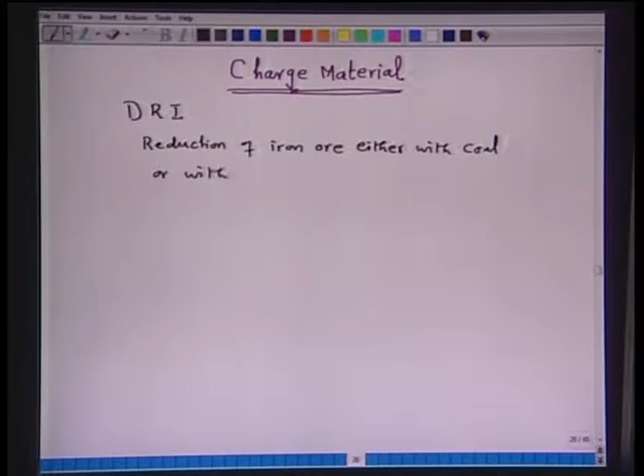Now, another charge material is the directly reduced iron, and that is what I will be telling you something about today. In fact, this directly reduced iron is produced by reduction of iron ore either with coal or with gaseous reducing agent.

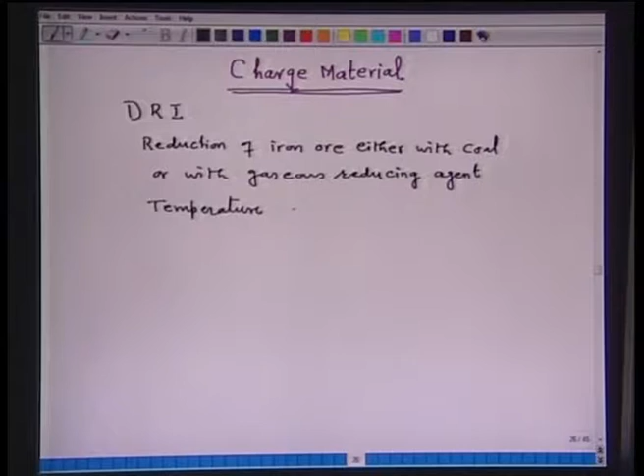So, the temperature in the production of DRI rarely exceeds 1000 to 1100 degrees Celsius. That means we are not melting any component of the iron ore, simply the oxygen content of iron oxide is getting removed. So, whatever impurities are in the iron ore, the same will be transferred into the DRI. So, essentially DRI or HBI both are the same thing.

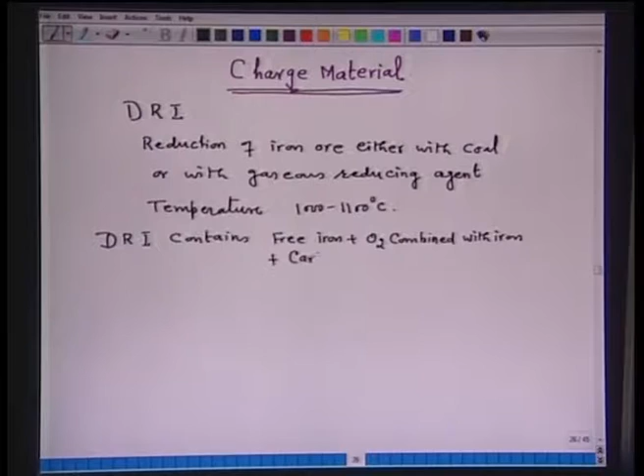DRI contains free iron, plus oxygen combined with iron, plus carbon which is left, plus gangue minerals, and these gangue minerals could be SiO2, Al2O3, TiO2, etc. That means whatever is present in the iron ore is transferred into the DRI, because no melting is being done; the reduction is carried out in solid state.

Therefore, it is important to characterize DRI. Characterize means what is the quality of DRI that is being used in the electric arc furnace as a substitute for scrap. So, for the quality of DRI, the first important parameter is percent metallization. And percent metallization is equal to free iron upon total iron into 100. That is one important characteristic of DRI before it is considered to be used as a substitute of scrap in electric arc furnace.

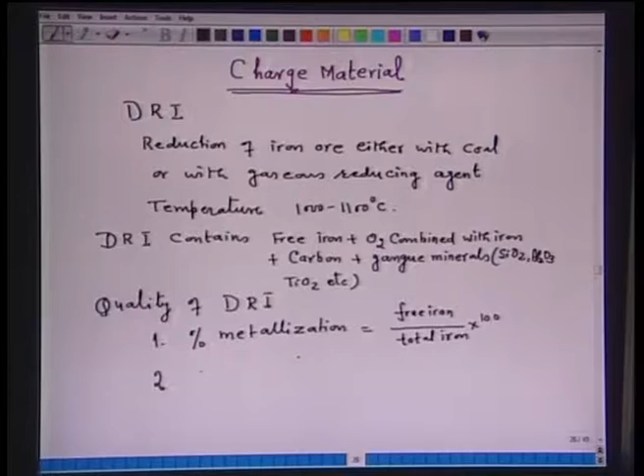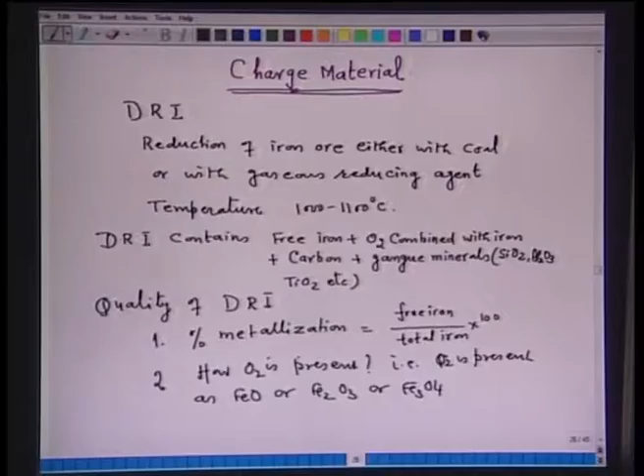Second important thing is how oxygen is present, that is, whether oxygen is present as FeO or Fe2O3 or Fe3O4. This is also important, in which form oxygen is present in combination with the iron, because any oxygen which is with the gangue mineral cannot be removed and it is not removed. That point should be clear. What removal of oxygen we are talking about is the removal of oxygen from Fe2O3.

So, if we say 90% metallization, that means 90% is the free iron and rest iron is either in the form of FeO, Fe2O3 or Fe3O4. Now, it is important to know in which form iron is, because ultimately when this DRI is charged in the electric arc furnace, we will like to reduce oxygen and get iron back as a yield. So, if the iron is present as Fe2O3 or Fe3O4, then higher amount of energy is required, but if it is present in the form of FeO, again higher heat load is required because FeO plus C is an endothermic reaction.

Now, let us calculate what is the amount of oxygen that is present in DRI. So, let us assume that oxygen is present in the form of FeO.

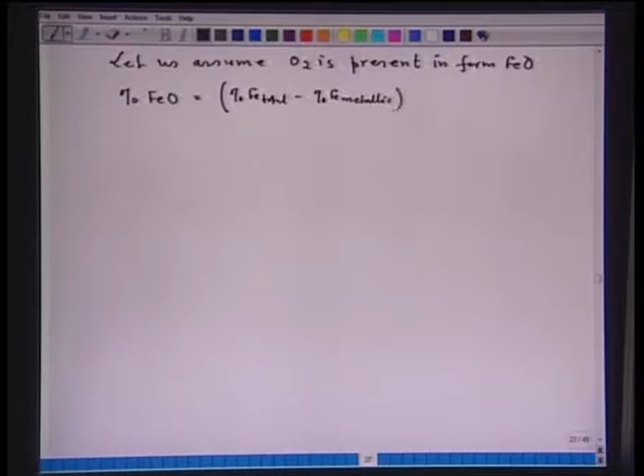Oxygen in DRI is present in form of FeO. So, we can calculate now percentage FeO, that will be equal to percent iron total minus percent iron metallic into 72 by 56. So, therefore, oxygen in percent will be equal to 0.285 into percent FeO, because 16 kg oxygen is present in 72 kg of FeO. From that you can get oxygen percent is equal to this.

Now, this is the oxygen present in the form of FeO. Now, this oxygen removal also requires carbon. So, therefore, carbon in DRI is important, because ultimately this FeO will react with carbon and we will get Fe plus CO, and this reaction requires carbon. So, if we look at this reaction, 16 kg oxygen requires 12 kg carbon. So, 1 kg oxygen requires 0.75 kg carbon.

So, what I wanted to say from here is that if carbon content in DRI is maintained at 0.75 ratio to the oxygen of FeO, then carbon will react stoichiometrically with FeO during electric arc furnace operation. That means what? If it reacts stoichiometrically, good, it will reduce FeO and you will get the iron. It is endothermic reaction, no heat will be produced.

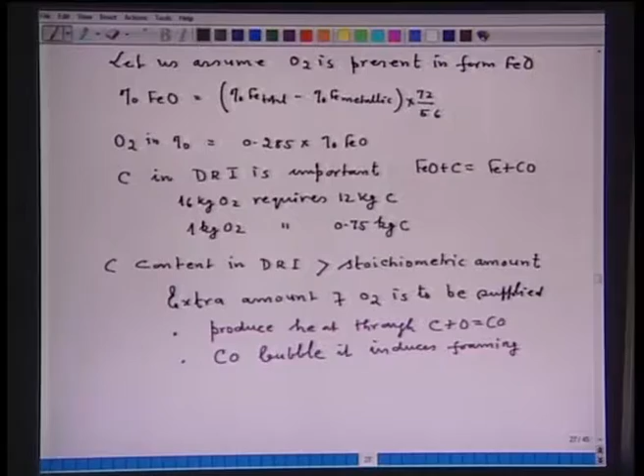So, what this discussion leads to is that for quality of DRI, there are certain important things. First is metallization, and second is the carbon content in DRI. Now, remember when I am talking of the oxygen content of DRI, I only mean that oxygen which is present with iron, because no oxygen present in the gangue mineral is removed in the process of manufacture of DRI. This should be very clear.

So, now let us see the effect of metallization. Take a case, for example, consider 100 kg iron ore, say 56% iron. So, it has around 80% Fe2O3 and 20% gangue, 80 kg Fe2O3 and 20 kg gangue. So, I carry out now metallization. I produce DRI from this particular iron ore, then I calculate kg iron, then kg iron which is combined with FeO, and kg gangue.

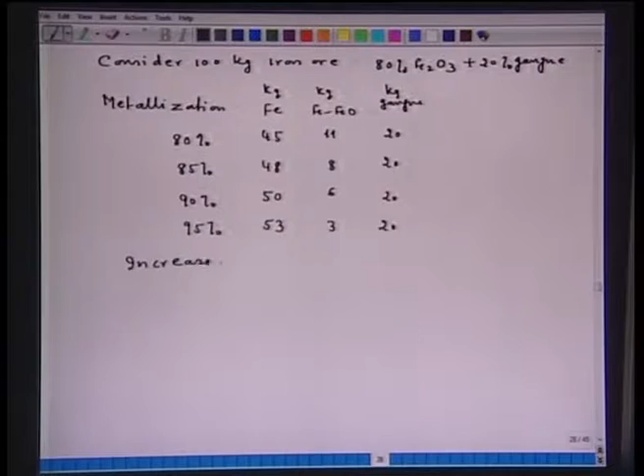So, what is important to see from here? If I increase the degree of metallization, what is it doing? It is increasing the free iron that is being charged with the DRI. That is, first it will increase free iron. It is good because it will contribute to the productivity directly. Second, it is decreasing the iron which is combined as FeO.

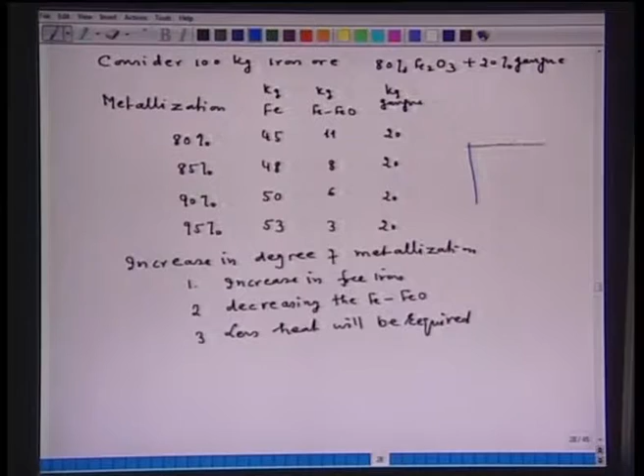That is also good because less energy would be required to reduce FeO by carbon to Fe plus CO. As a result, less heat will be required during processing. Productivity will be more. So, to illustrate schematically, if I take productivity and plot it against percentage metallization, going from 80% to 95%, productivity will increase as the degree of metallization increases from 80% to 95%.

But in order to produce a high percent metallization, the investment cost is also important, because it takes sufficient time and sufficient thermal energy to produce a highly metallized product, that is a very high quality product. And besides that point, for argument's sake, if we increase the metallization in our DRI, then our productivity is increased. Now, let us see another effect.

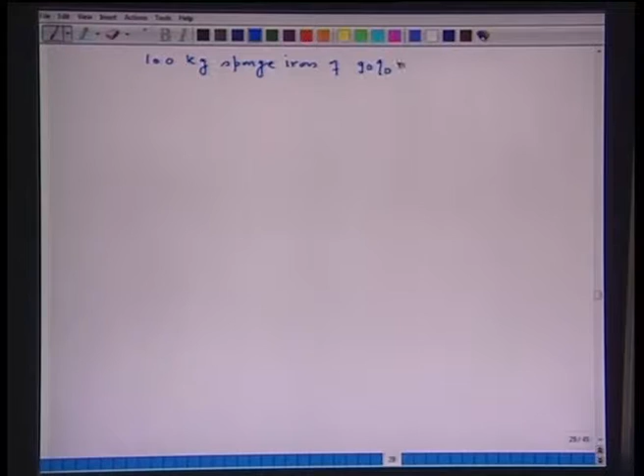For example, for a constant degree of metallization, if we increase the proportion of sponge iron, that is, I take 90% scrap, 10% sponge iron; 70% scrap, 30% sponge iron; 60% scrap, 40% sponge iron. I vary the proportion, then let me see what effect it has on the various constituents. So, I am taking now 100 kg sponge iron or DRI of 90% metallization. Just a background calculation: you require around 132 kg of iron ore of 80% Fe2O3 and 20% gangue.

So, if you want to calculate the effect of changing the proportion of DRI in the feed on free iron, Fe as FeO and the gangue, then you have to perform the calculation by considering how much iron ore is required, how much iron it has and how much gangue it has. I have done this calculation and I am presenting here. So, I take scrap, then sponge iron, then free iron, then iron which is present as FeO and the gangue content.

So, if I take 90% scrap, 10% sponge iron, 10 kg, free iron will be 6.6 kg, 0.8 kg as FeO and 2.6 kg gangue. If I take 70% scrap, 30% sponge iron, I have 19.8 kg free iron, 2.4 kg iron as FeO and 7.8 kg gangue. If I take 60% scrap, 40% sponge iron, 26.4 kg is free iron, 3.2 kg iron as FeO and 10.4 kg gangue. If I take 50% scrap and 50% sponge iron, 33 kg will be free iron, 4 kg as FeO and 13 kg present as gangue.

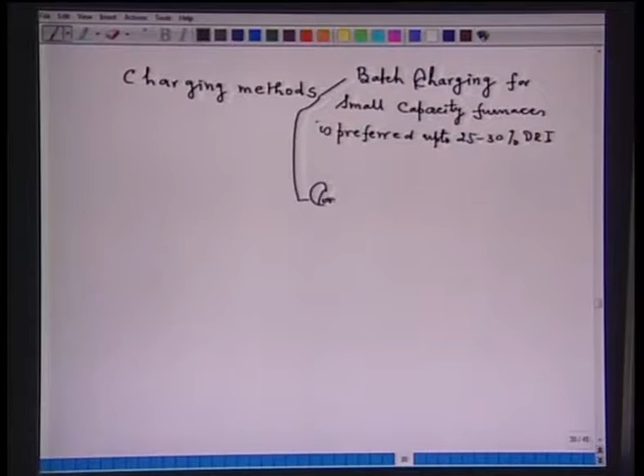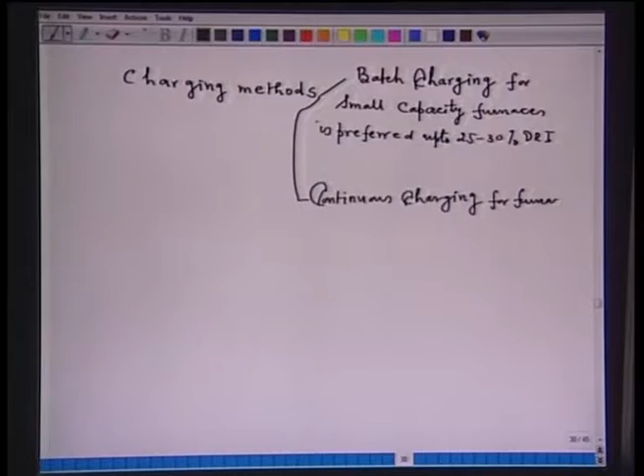So another method is continuous charging. Continuous charging is done for furnaces of 10 tons capacity or more than 10 tons capacity. And this continuous charging has certain advantages.

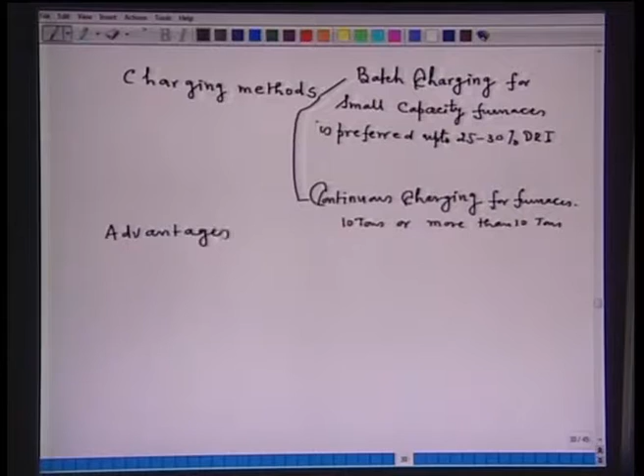We have the roof of the electric arc furnace where 3 electrodes are inserted. Still there is a space on the roof, and that space can be used for charging sponge iron continuously as and when it is required. So now you do not need to open the roof for charging as you have to do for batch charging. The first advantage is less power-off time, because you do not need to switch off the power while charging as in case of batch charging.

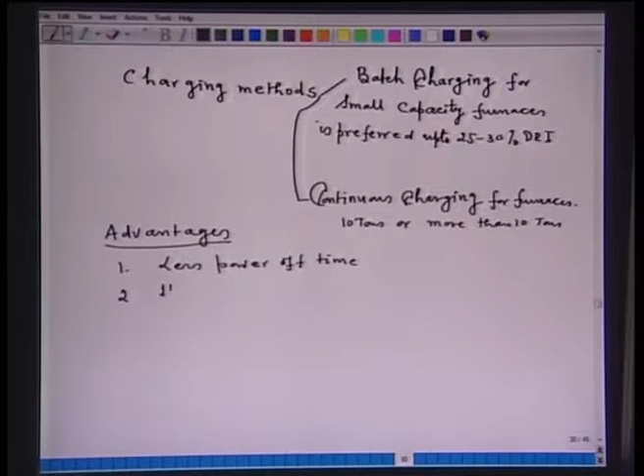Second, heat losses resulting from delays are eliminated. It is obvious, is it not? You are not removing the roof as you did for batch charging, so the heat losses during charging are not there. Delay is also not there, because the process is going on and charging is also going on. Third, as a consequence, you have lower electrical losses.

Fourth, overlap of charging and refining. What does it mean? Both charging and refining can be carried out simultaneously, because the process is on and charging is continuous. So charging and refining are overlapping each other, that is good.

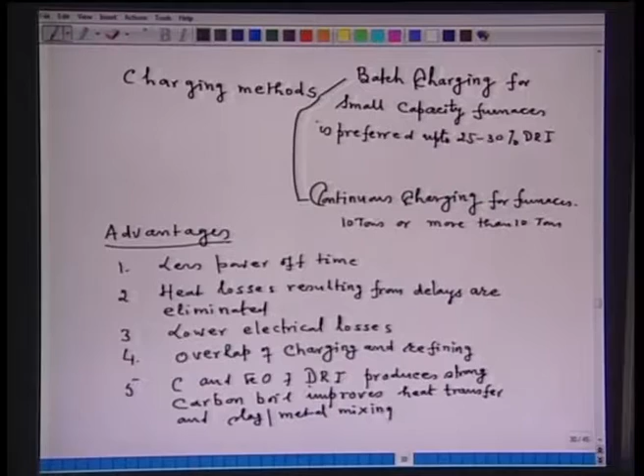So, this carbon boil improves heat transfer and slag metal mixing. These are certain advantages associated with continuous charging. Anything which is continuous, all the delays associated with the batch are eliminated, and hence the advantages are obvious.

Now, a little bit about the Indian condition. Under Indian conditions, the power consumption is around 600 kilowatt hour per ton with heavy melting scrap. If 40 to 50% of scrap is substituted by sponge iron, power consumption will go up roughly 10%. This is mainly because you have introduced extra gangue content and you need to remove the oxygen of FeO.

In fact, an electric furnace can be charged with 100% sponge iron also, but this is only possible for ultra high powered furnaces. So, this is about the assessment of DRI as a feed for the electric arc furnace. Now, third is the use of iron carbide.

Use of iron carbide, which is Fe3C. Now, this Fe3C contains 6% carbon. The melting point of Fe3C is 1837 degrees Celsius. It's a very high melting point. It can also be used as an alternative charge material, but certain precautions are to be exercised during charging.

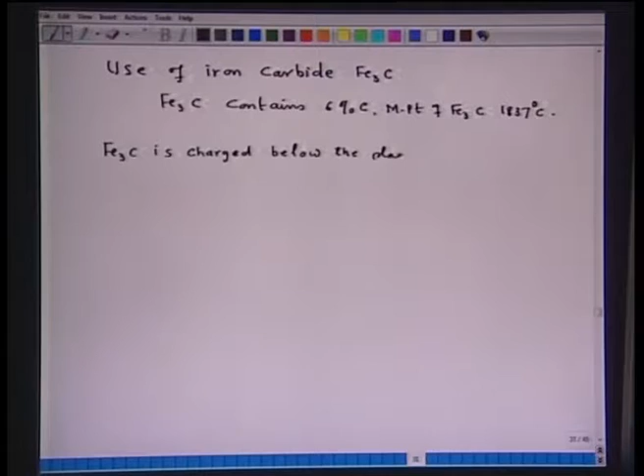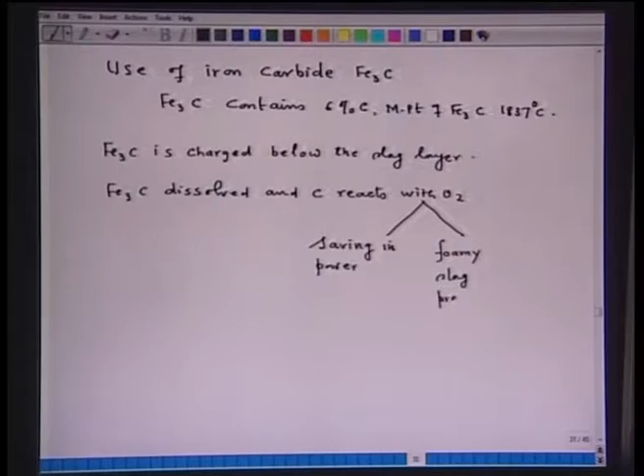First of all, Fe3C is charged below the slag layer. Why? Because then it can dissolve. So Fe3C dissolves in metal, and carbon reacts with oxygen. It will give two benefits: one, saving in power, and another benefit is because carbon monoxide is evolving through the charging of Fe3C, it will also contribute to foamy slag practice.

So, this is about the alternative charge materials. In the future, the proportion of sponge iron, hot metal or Fe3C will increase, and its increase would depend upon the quality of scrap available and the quality of steel that is desired. So, that is all about the alternative charge material. Now, the next topic that I want to tell you is about stainless steel making.

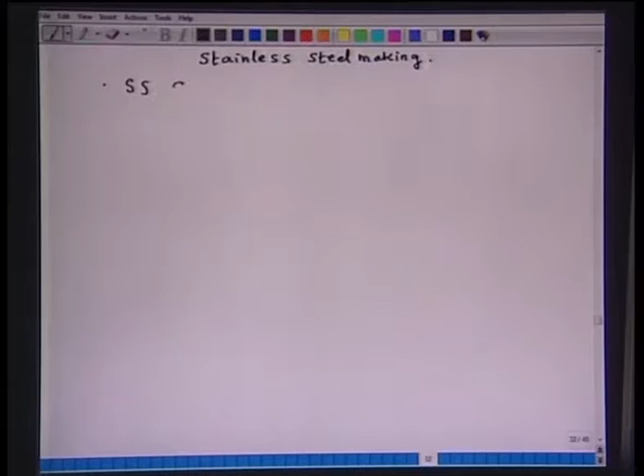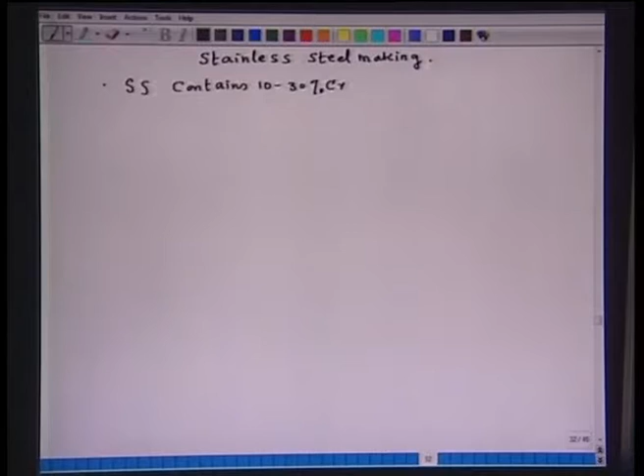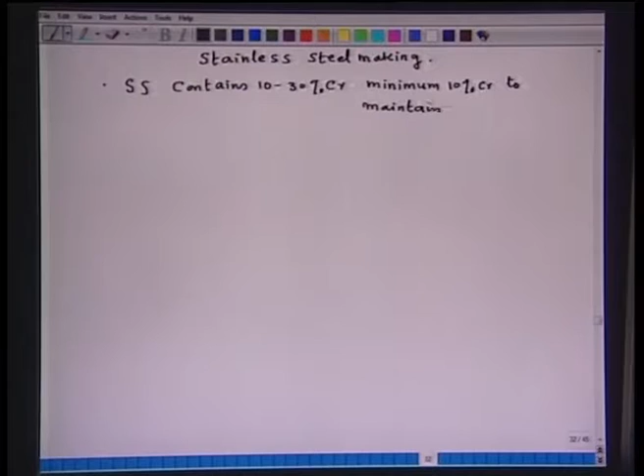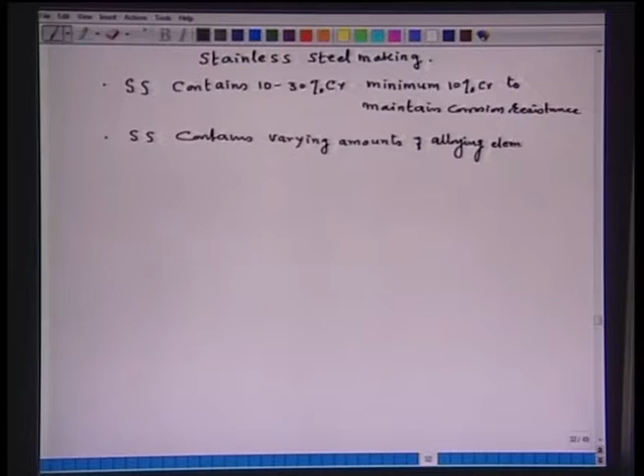Now, stainless steel, denoted by SS, contains 10 to 30% chromium. Minimum 10% chromium is needed to maintain corrosion resistance. Second, stainless steel also contains varying amounts of alloying elements like nickel, molybdenum, vanadium, titanium, etc. These alloying elements are added in order to get some special property.

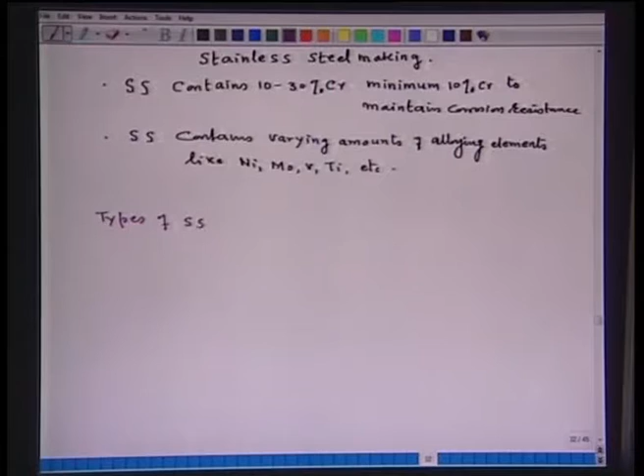Now, certain types of stainless steel. One, austenitic. A rough idea of the composition: 18% chromium, 8% nickel, carbon may vary from 0.03 to 0.15%. So, remember, austenitic steel is characterized by low carbon and high chromium. That is important for the lecture which is coming now. Another grade is ferritic, which has 12 to 30% chromium, 0.08 to 0.12% carbon, again low carbon, high chromium.

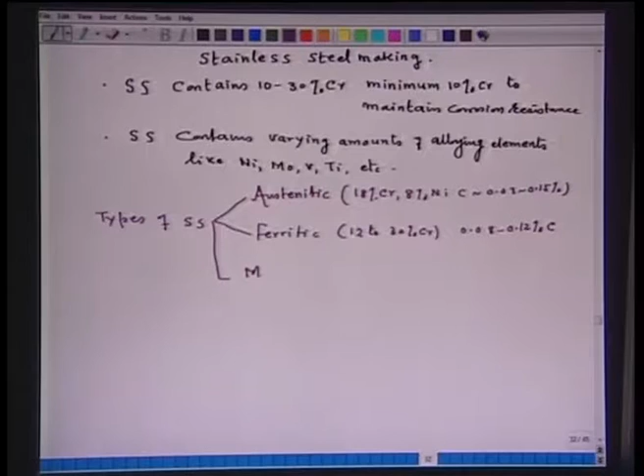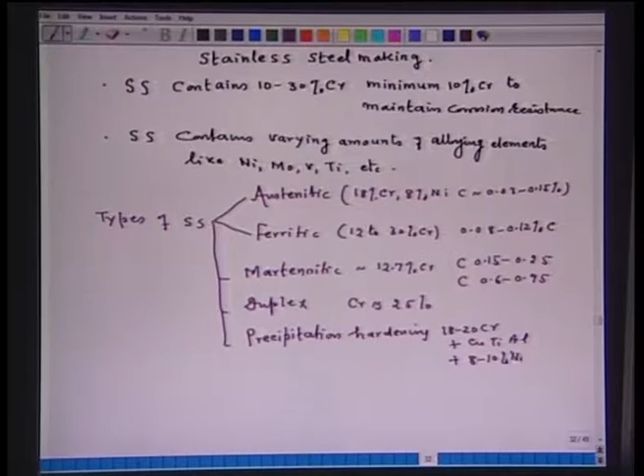Third grade is martensitic, with approximately 12.7% chromium. The carbon content may go from 0.15 to 0.25, but certain grades have carbon between 0.6 and 0.75. Another variation is duplex steels, where chromium is around 25%. Then there is still another variety, the precipitation hardening steels, with 18 to 20% chromium plus copper, titanium, aluminum, plus 8 to 10% nickel. They are highly specialized steels used for certain specific purposes.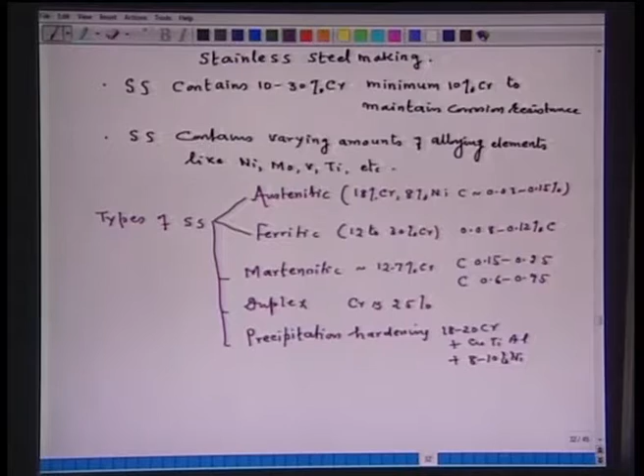Now, about the production of stainless steel: the electric arc furnace is used for production of stainless steel through melting stainless steel scrap. Hardly any refining was required because stainless steel scrap of the required composition was available; it was melted, and stainless steel of that particular grade is there. But over the years, the shortage of high quality stainless steel scrap has required finding alternative charge materials so that the quality of the steel remains as required.

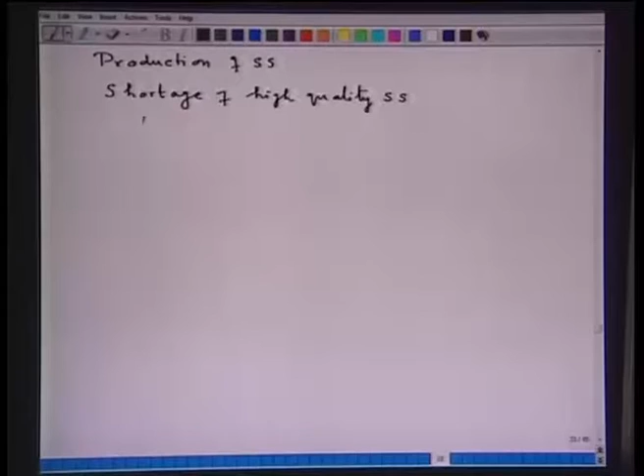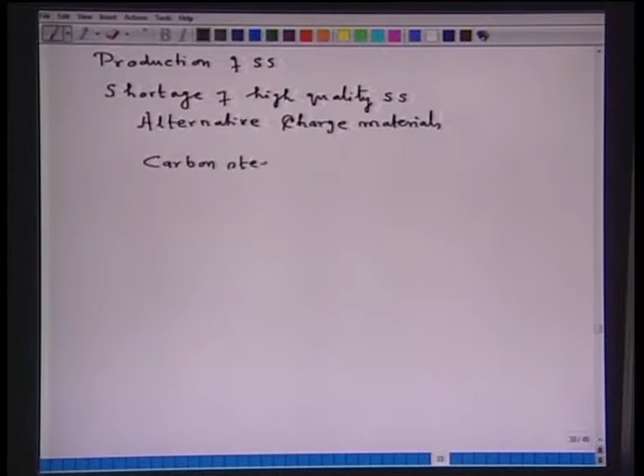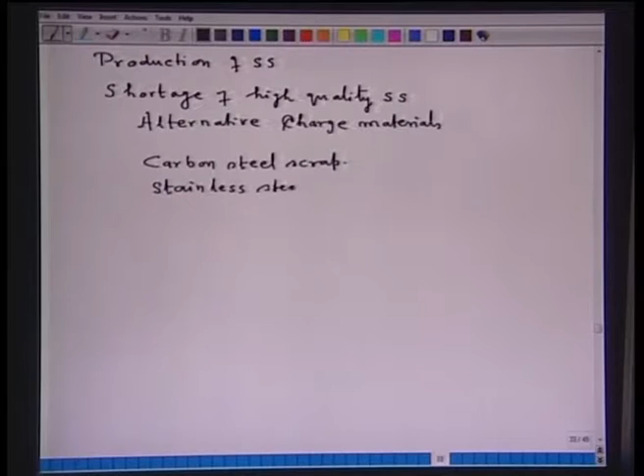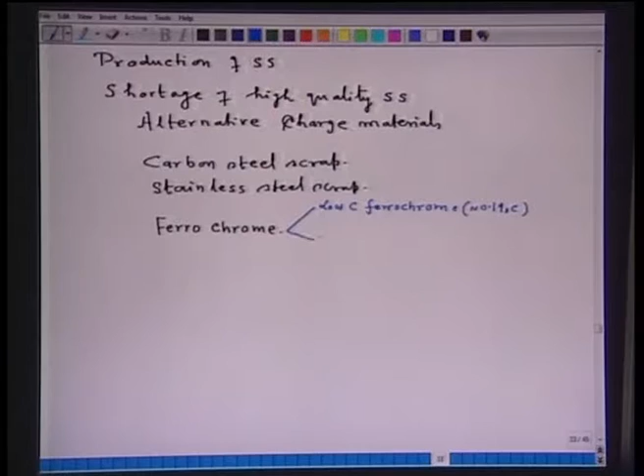So, this required alternative charge materials. Now, what are these alternative charge materials for production of stainless steel? One, carbon steel scrap. Then of course, stainless steel scrap. Then, in order to meet the chromium content, you have to charge ferrochrome. There are 3 grades of ferrochrome available: low carbon ferrochrome, with approximately 0.1% carbon; medium carbon ferrochrome, around 2% carbon; and high carbon ferrochrome, which may have approximately 7% carbon.

What is the problem in this? The problem is very simple. You are charging carbon steel scrap and stainless steel scrap; you mix and calculate, and the amount of chromium is far less. Then you have to add charge material which contains chromium. That means ferrochrome is to be produced. You can argue, sir, let us use low carbon ferrochrome, fine.

The production of low carbon ferrochrome is very expensive as compared to production of high carbon ferrochrome. If you have read the production of ferroalloys, you will recall from there that production of low carbon ferrochrome is very expensive as compared to production of high carbon ferrochrome.

As a technologist, as a producer of stainless steel from electric arc furnace, you will like to use medium or high carbon ferrochrome if the technology exists. Otherwise, you have no choice except to use low carbon ferrochrome and to see what is the cost of the stainless steel that is coming out of the furnace, because the cost of production of ferrochrome will also be added up in the cost of stainless steel. So, this is the main issue, whether we go for low carbon or high carbon or whatever type of ferrochrome.

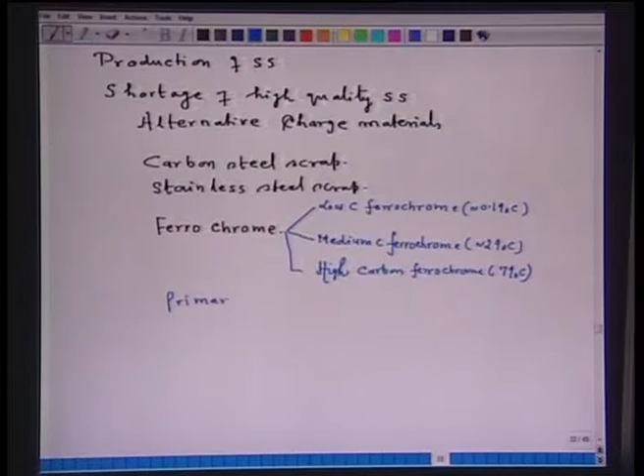Another alloying element is primary nickel you also require to add, because for certain grades which require nickel, you have to add nickel. So, what has become important now for production of stainless steel is that refining became essential to produce stainless steel in electric arc furnace. As you noted, the different grades of stainless steel require very low carbon. So, if you use high carbon ferrochrome or carbon steel scrap, then the carbon content of the bath is very high. So, you have to decrease the carbon, that means you have to refine.

So, the refining became essential, and the refining of stainless steel essentially consists of carbon and chromium, and to obtain both carbon and chromium up to the specification. What does the science say? The science says, if you have a melt which contains iron, carbon and chromium, and if you supply oxygen for removal of carbon, if you see the Ellingham diagram, you will note that the oxidation of carbon begins only at high temperature. So, unless you have a very high temperature, the carbon oxidation will not proceed.

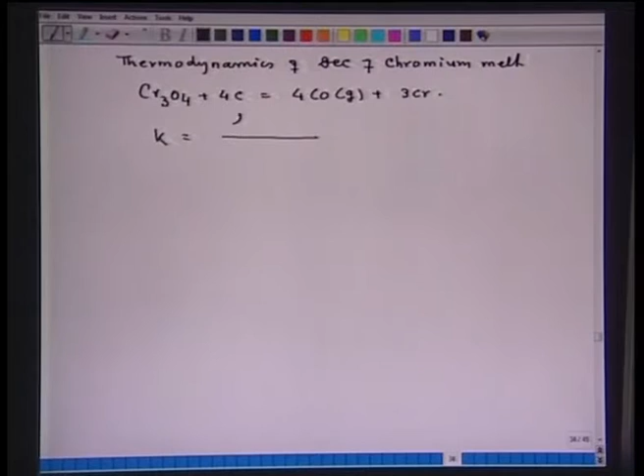Now, if you write down the equilibrium constant K, that will be equal to h_Cr cubed p_CO to the power 4 over h_C to the power 4 and activity of Cr3O4. Remember, again the liquid steel follows Henry's law. So, accordingly we make certain assumptions. Let us take activity of Cr3O4 equal to 1, h_Cr equal to f_Cr into weight percent chromium, and h_C equal to f_C into weight percent carbon. So, if we replace h_C and h_Cr, and activity of Cr3O4 by 1, then we get K equal to (f_Cr weight percent chromium) cubed, p_CO to the power 4, over (f_C into weight percent carbon) to the power 4, and activity of Cr3O4 is equal to 1.

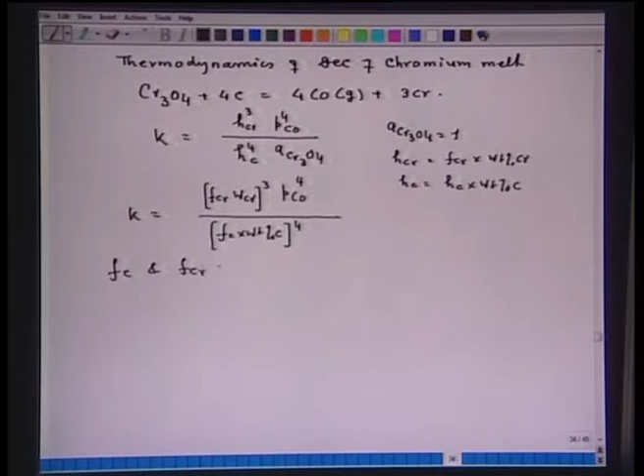Now, f_C and f_Cr are the activity coefficients of carbon and chromium in the melt. Now, this is a very complicated relationship. Now, Hilty and Kaveney have proposed the following equation.

log of weight percent chromium in the metal upon weight percent carbon in the metal is equal to minus 13800 upon T plus 8.76 minus 0.925 log of p_CO. Now, this equation is valid when there is no nickel. T is to be substituted in degrees Kelvin.

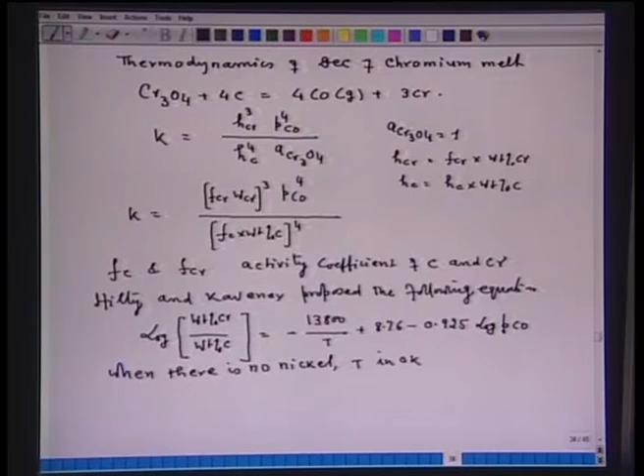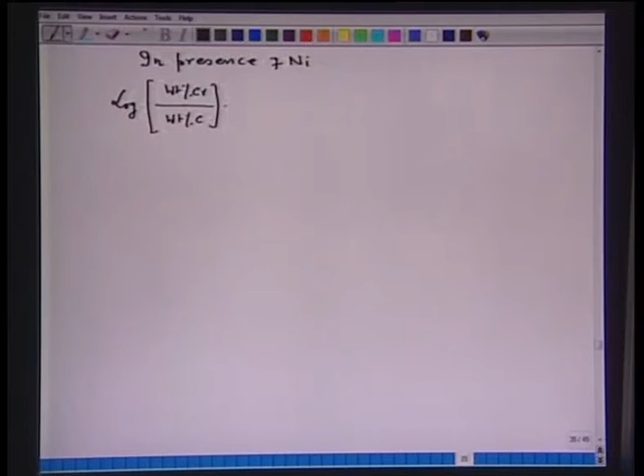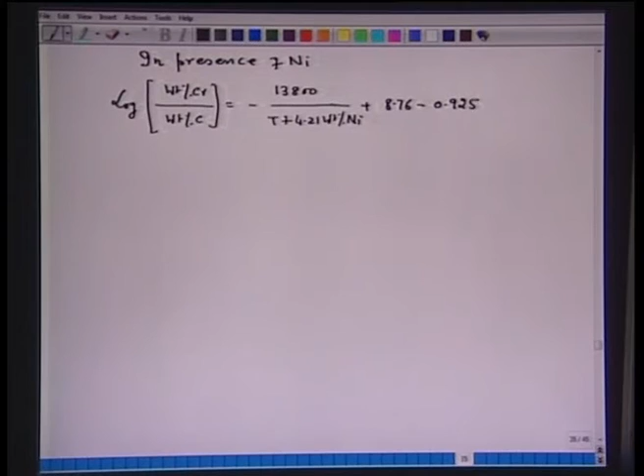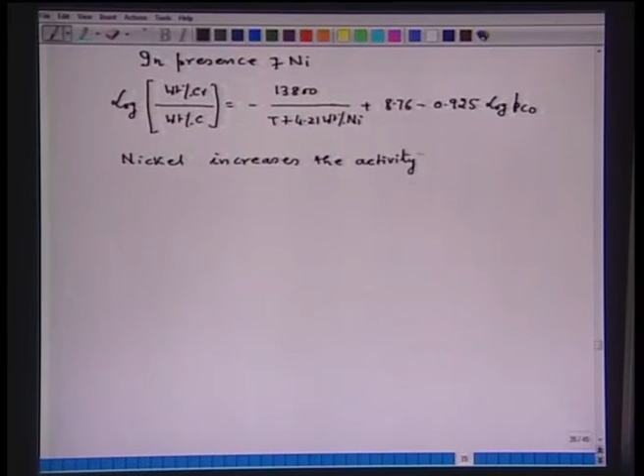Now, in presence of nickel, the following equation is to be used: log of weight percent chromium in melt upon weight percent carbon in melt is equal to minus 13800 upon T plus 4.21 weight percent nickel plus 8.76 minus 0.925 log of p_CO. Now, why is it so? Nickel increases the activity coefficient of carbon in the melt.

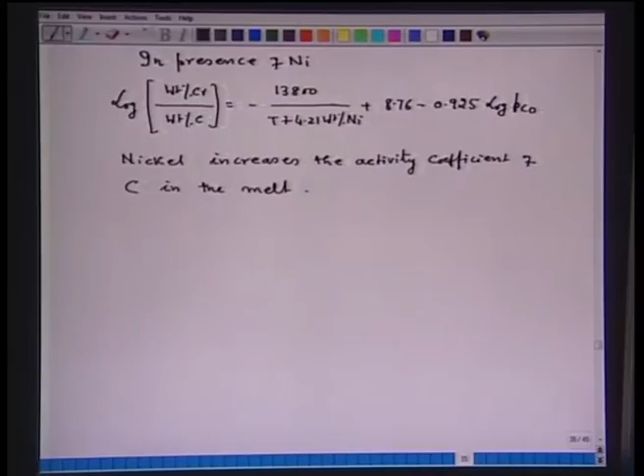Now, what can we do? We utilize these two equations and we can calculate the ratio of percentage chromium upon percentage carbon in the bath as a function of temperature as well as a function of p_CO, to illustrate what will happen if we increase the temperature or decrease the partial pressure of carbon monoxide, and this we will be taking in the next lecture.